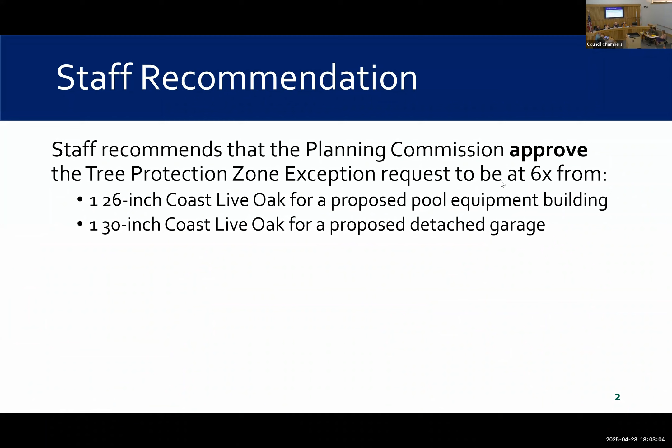Hello, I'm here to present a tree protection zone exception for 99 Edwards Lane. Staff recommends that the Planning Commission approve the tree protection zone exception request to be within 6 times the distance from two different coast live oaks. One is a 26-inch oak, where they're proposing the pool equipment building be within 6 times of that one, and the other is a 30-inch coast live oak where they're proposing a detached garage.

Some background: Edwards Lane is a cul-de-sac, a spur off of Atherton Avenue, just south of El Camino Real. This property, 99 Edwards, sits at the end of that cul-de-sac. It's a vaguely square-shaped lot, though it has a divot in the north corner that was ceded to the property next door, which shares common ownership, done through a lot line adjustment last year. Otherwise it's a roughly acre lot, 177 feet at the short end, 222 feet at the long end, with a depth of 206 feet. It's a generally flat lot, though the Atherton Channel runs through a swale in the rear, represented by a 20-foot easement. It's in the R1A zoning district, and the surrounding lots are mostly irregular shaped, ranging from about an acre up to 2.5 acres. The entire neighborhood is odd-shaped lots.

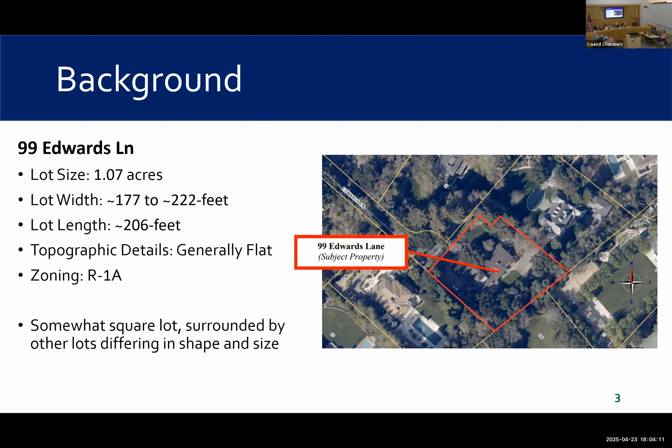For the project description: right now on the lot there's a pool house being proposed, an addition/remodel to the main residence, and a generator. But the two items underlined at the bottom are what's relevant to the tree protection zone exception.

There's a pool equipment building located in what's shown on the site plan in the top right corner. It will be located over the footprint of an existing pool equipment shed, expanding only slightly, with the entire building set to be 80 square feet. At the bottom, which is the side property line, there's a detached garage proposed, which will have vehicle space as well as storage space.

Existing on the lot is a 5,837 square foot main residence with an attached garage, a pool, and a pool equipment building. Some of these other projects have been approved, I believe the pool house, while the rest are still in the review process. The pool equipment building and detached garage, pending any commission decision, are otherwise approved by building and planning.

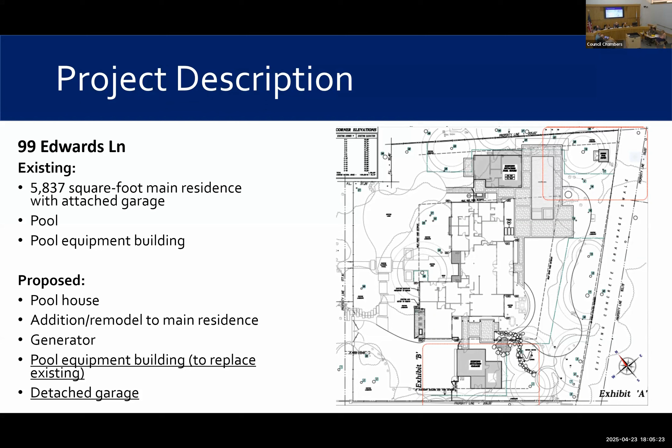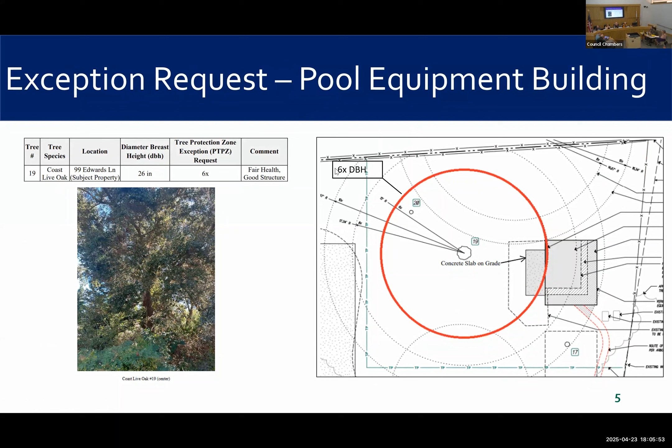Next slide, please. And the detached garage is proposed to be 6 times the diameter from a 30-inch coast live oak, which is located on the adjacent property at 80 Edwards Lane. Just like the other one, it's also in fair health and good structure.

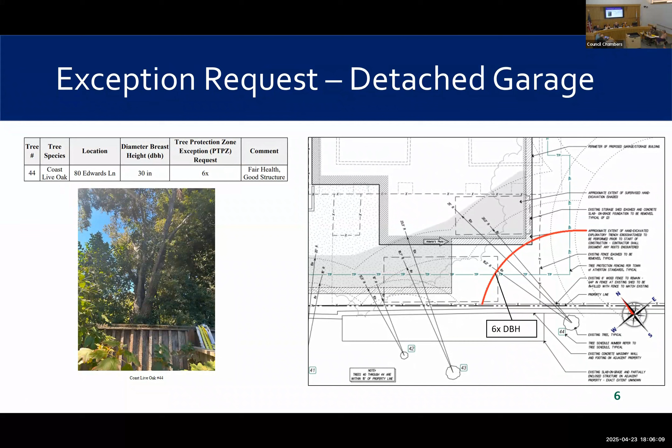Next slide, please. So the applicant's rationale for approval from the Planning Commission is that the TPZ encroachment, going within 10 times the diameter at breast height of both trees, is relatively minimal and much less than what's recommended as the maximum for the health of the tree.

Existing site conditions, like I said earlier, the pool equipment building is being built mostly on the existing footprint, and it's even expanding just a little bit, but away from the subject tree. For the detached garage, there's already an existing masonry wall between the tree and the proposed detached garage, which they believe over the years has likely stopped roots from growing in that direction. So the potential impact to the roots may be minimal.

The project arborist also—can you go to the original slide, please? Thank you. The project arborist did exploratory trenching around the site of the proposed detached garage and found that there were no significant roots from tree 44 or other trees in the area. They found only a few roots, and none of them were over 1 inch in diameter.

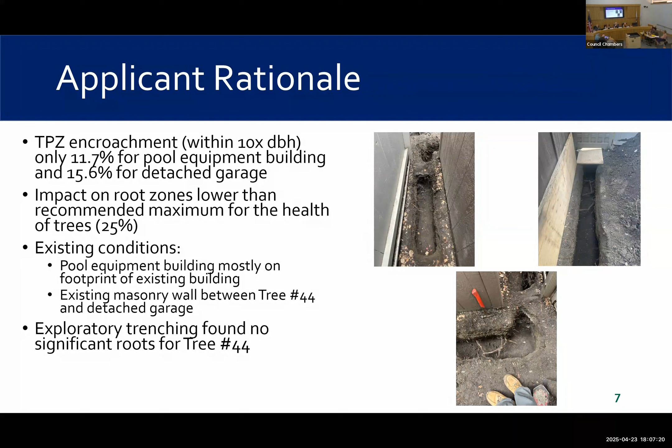Next slide, please. The town arborist concurs with the rationale of the applicant and the project arborist, that the trees are in fair health and good structure, and the potential impact to the roots would be minimal. The existing site conditions with the pool equipment building and the trenching around the proposed garage show that there isn't too much risk of detriment to the health of the trees. As long as they take the necessary precautions, the trees should be able to remain healthy in the future.

As well, Sally did go to the site to view the exploratory trenching, and she recommends approval. In her memo, which is included as an attachment as well in the staff report, you can read the conditions that she put on that approval.

Sally, would you like to add anything? Yeah, as Jerry said, I visited the site and I found no significant roots. The applicant worked with the town to submit the best submittal they can. The oak tree on the neighbor's site has good construction, a good rating for construction impact. With no major roots found, and that being really the only location for a garage on the site—if they tried to put a garage in another location, they would have to build an additional driveway and work around other trees—this is the most ideal situation for a garage. For all those reasons, I can approve the 6 times distance for both trees.

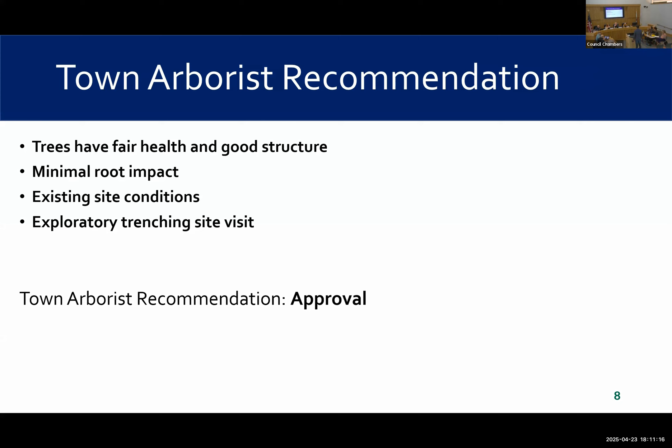Questions? We met with you when we were on the property. Yes, of course. Okay, no questions? Nothing? All right, great presentation. You can put your slides away.

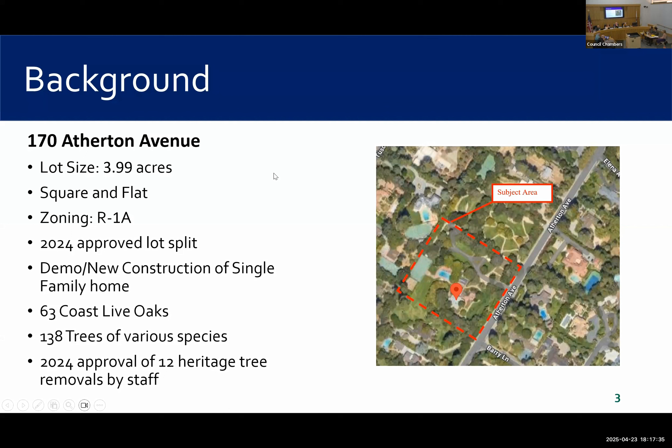One of the things I've left in front of you tonight is a printed letter from the applicant, who's here to speak on this project. There were 2 letters submitted by the applicant; only one was included in the staff report. So I shared the second one with you earlier today by email, and also printed a copy here. Really, the substance of those letters focuses on the justification for these 4 trees. Next.

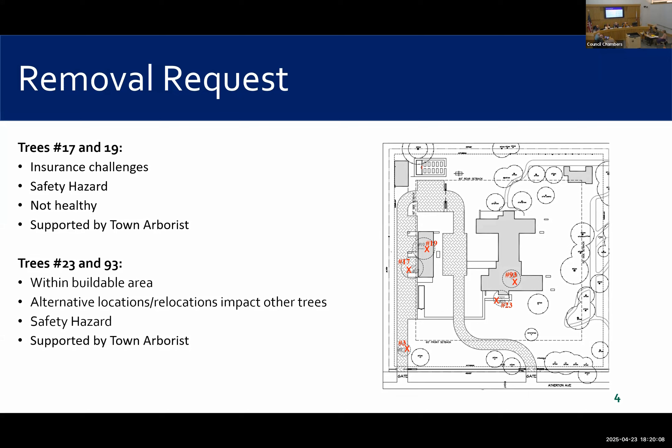So the relocation tree request for tree number 3 - this one's where there's a bit of an impasse between staff and the applicant, and we could use guidance from the planning commission directly. The applicant's justification is that this limits driveway accessibility, but the town arborist does not support this removal. Technically, relocation is tantamount to removal, so that's why I'm referring to it as such. Since the town arborist was working with the project team in 2024, they've paid special attention to this tree to improve its health. Now there's concern that relocating the tree just as its health has improved could cause damage and deterioration. There's also consideration of whether the need to relocate the tree could be avoided through an alternative driveway path.

However, if the planning commission does agree that the relocation should be approved, staff is asking that they add a condition relative to maintaining the health of the tree in perpetuity - or as long as it should normally live - that the appraised value of the tree times 2 would be the fine in the case of the tree dying within 5 years. That would be indicative of the relocation not going according to plan.

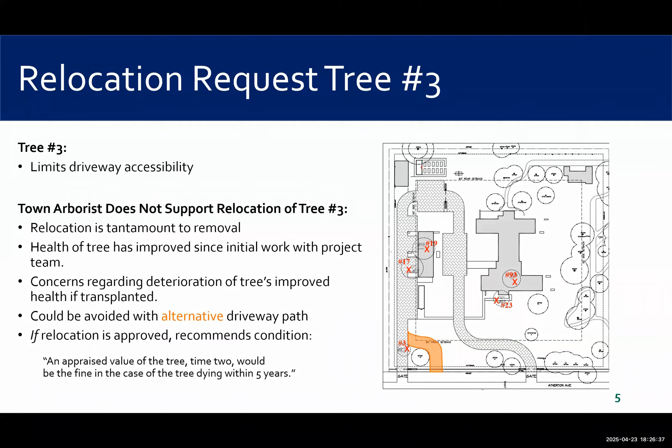Hold on, let me see if I can turn it on. Okay, it's disabled.

Just briefly, I have my project manager and the owner rep, Gary Steven. He is on the phone, on the line, for the answer also.

I'll jump right to the question you posed. For the workshop, the location is basically from the program we have through the owner, and they do their workshop and art collection there, and these will all be adjacent and close by to their main residence. This is how they require it, and that building will form a nice entry, arrival court to the building entry. That's purposely how we tried to position the location. And because it's a one-story structure, I don't think it will pose any visual impact to the site.